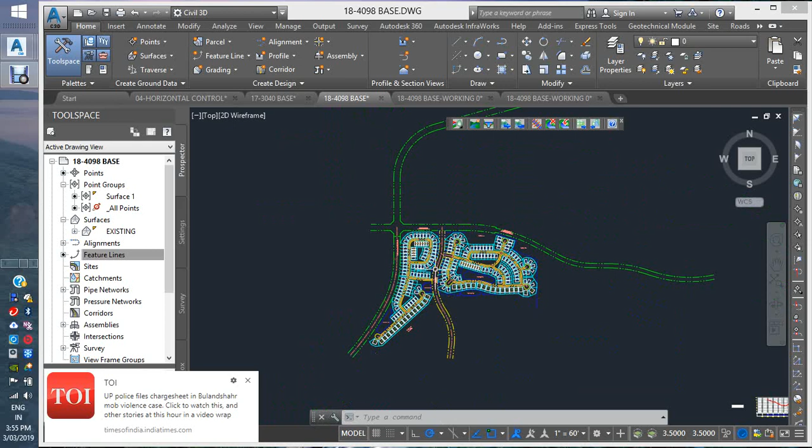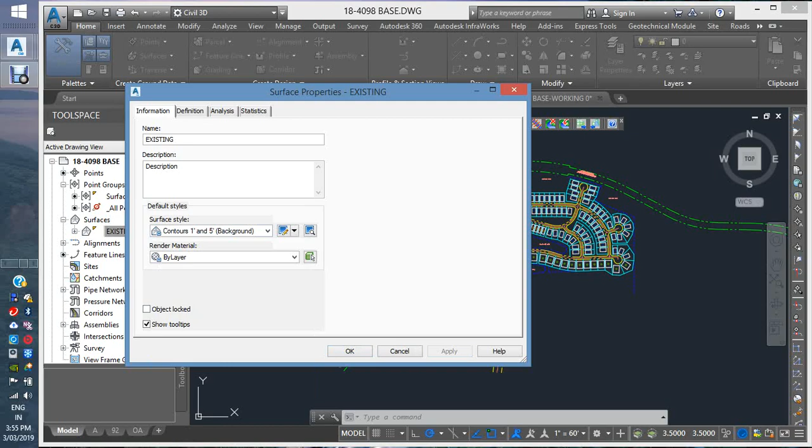Just before execution, just looking at the line work and understanding the surface, so how Civil 3D works in that. If I click on a surface and surface property, you can see the surface isn't highlighted. Probably the layer has been turned off, but if I change the contour surface style differently, it will straight away appear. I can try applying this different style, and you can see that the surface appears.

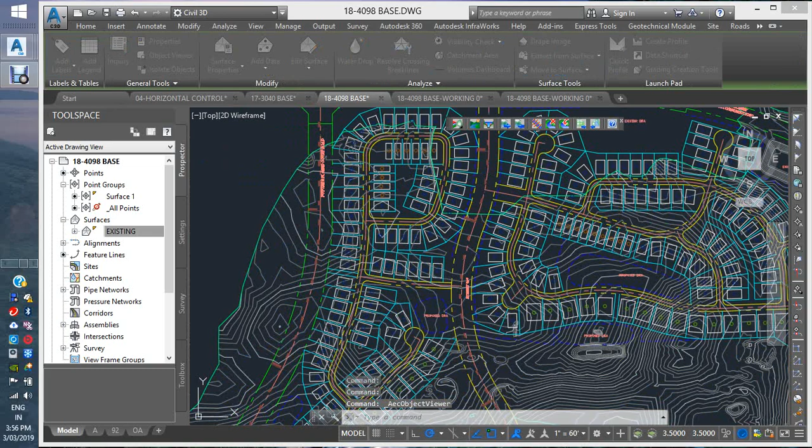This road is connecting to here. We haven't got much information in this area as well. There isn't much surface here. If I click the surface, object viewer, you can see that the extent has been missed out. However, I can see some of the features of the site - could be a bank, depression, some sort of channel, some sort of drainage in here.

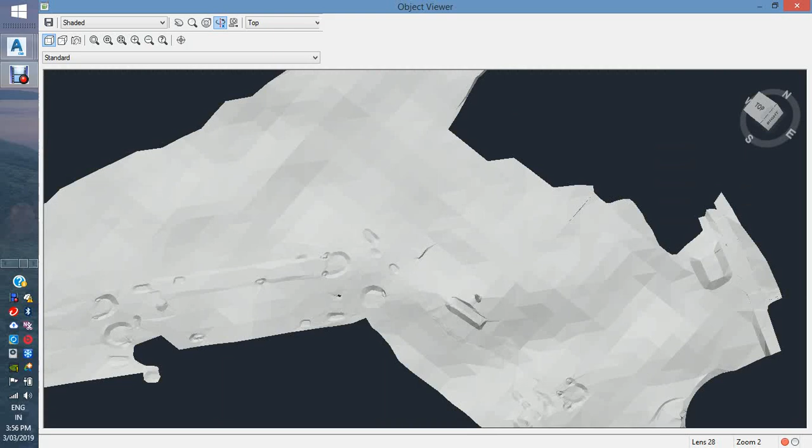I need to see the points, so how Civil will help in defining the points. Points are the collection of attributes of the ground, and you can see that there isn't much going on in here, but there is much going on in here.

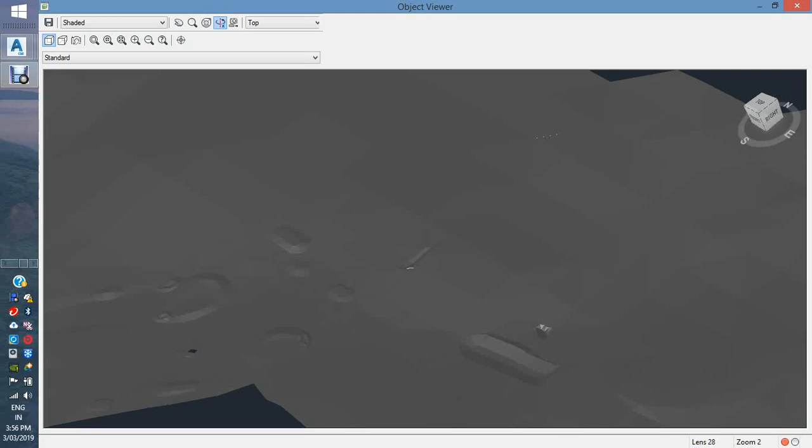So let's just go into points. You can see there are all points, nothing much information about point group, which is banks, top, down, natural surface, but all points are in one.

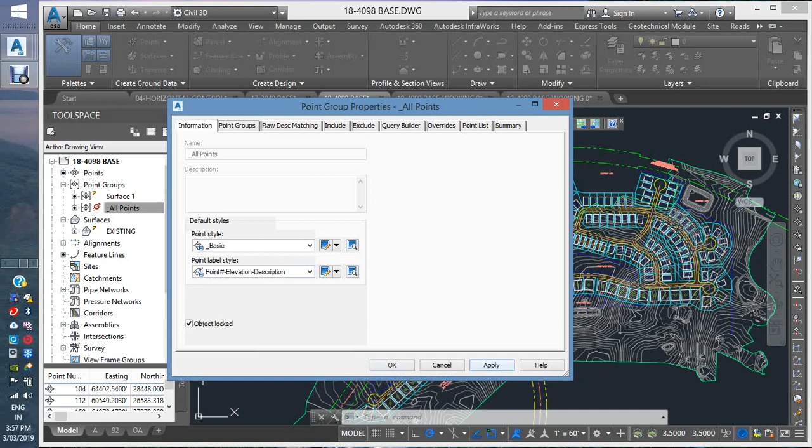If I click here and property, points are not highlighted - could have been a different line type or something. I can change the point style and see if it appears. Still it doesn't appear, could be the layer is turned off. The easy approach is select all layer, Control A, de-highlight, and then turn back on.

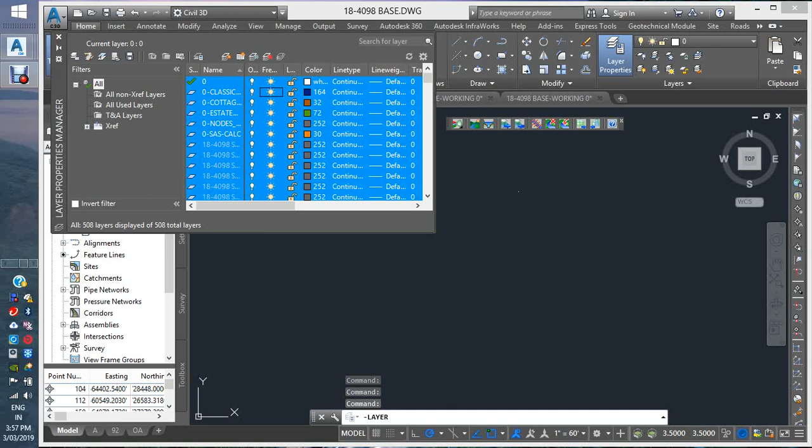By doing that, rather than going into detail and finding the point layer for each one, the points appeared straight away. As you can see, a bunch of points have appeared.

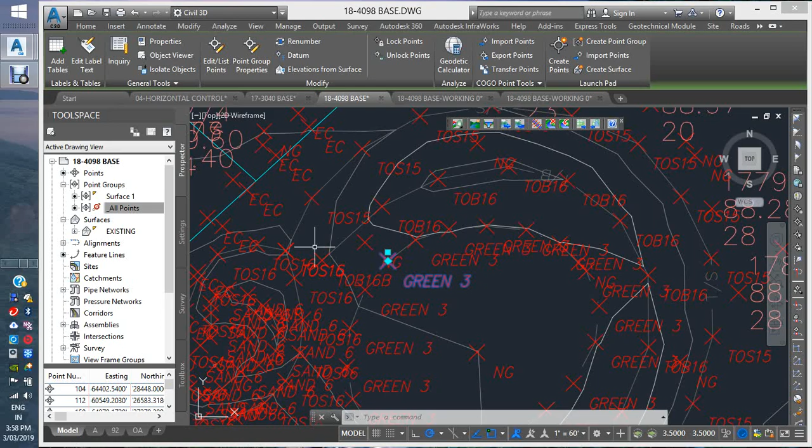Somehow by clicking a point, a list will pop up, but now it looks like something is just not right here - it's going a bit less. By changing the scale to a lower one, you can see the description properly.

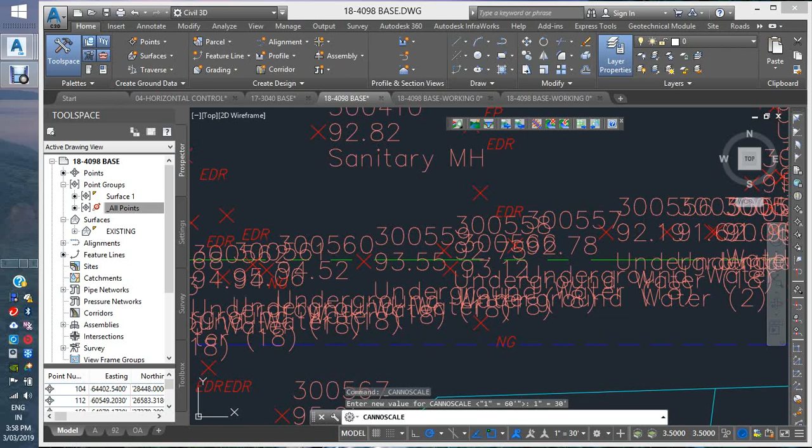So just processing - there seems to be underground water at this point. There isn't any information on the survey. However, it could be - not sure why I'm not selecting this point.

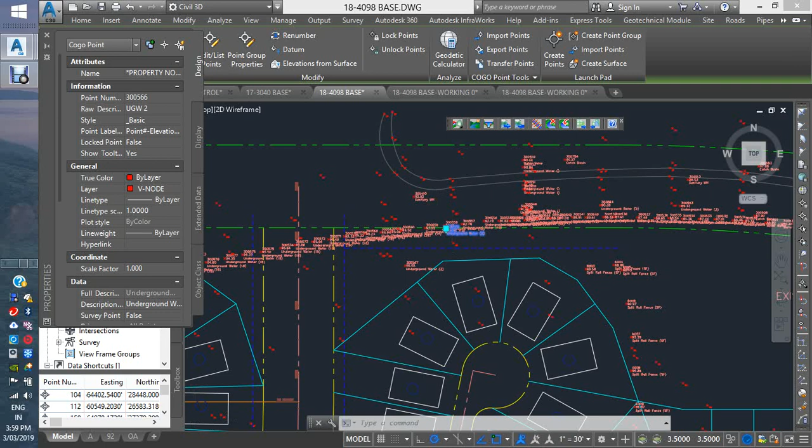So added point list will give me a description. Is that point referring to pipe invert or what? The description is defined as underground - it could have been over invert. That just needs to be explored.

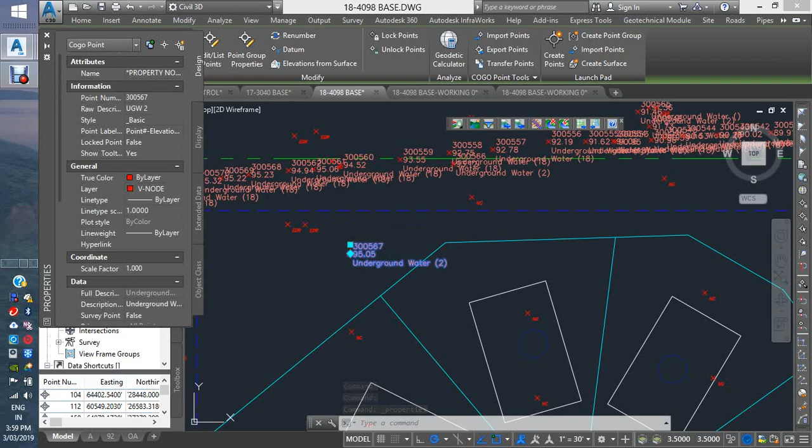Underground water again - just clicking that and property, again that description is underground water too. I'm not sure where the water is going. The few points are the edge of pavement - it could be EP. They have been joined, as you can see here.

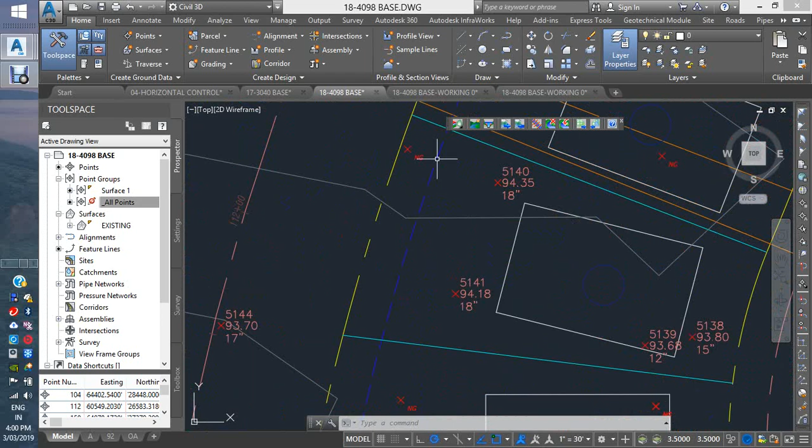So then NG refers to natural ground - that sounds okay. This point is pine - not sure what pine 18 inch is. Is that a width of the spread?

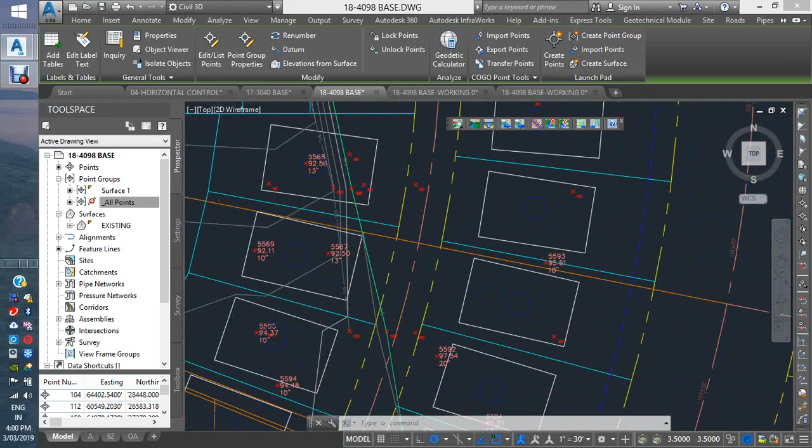Not sure - there was a point called rail fence, split rail fence. Not sure are they being joined - hasn't got joined into it. Underground water has been unlinked. This point has been joined to top of soil - that looks okay.

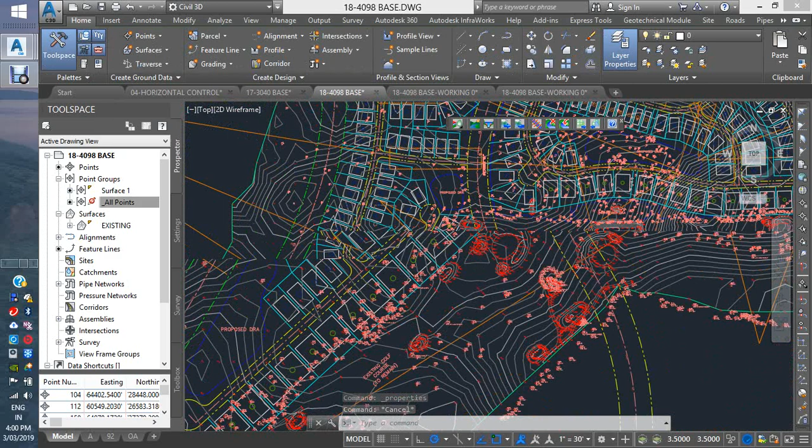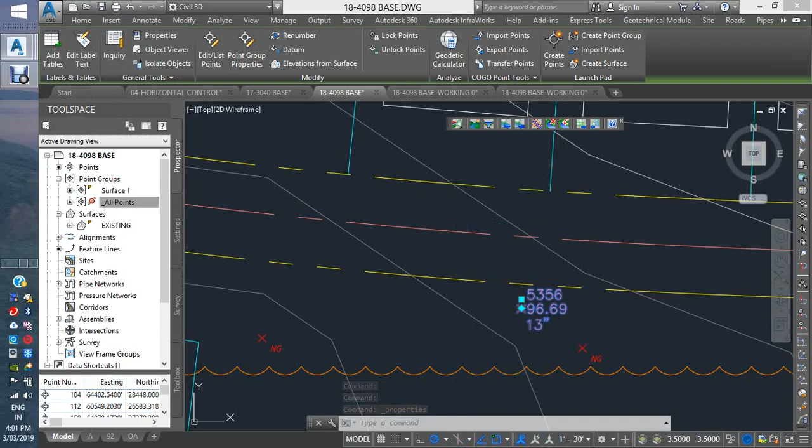There was a tree line somewhere else going on - for example here, what is this point referring to? Pine 13 inch - not sure what that means. There is no tree symbol in the survey as well.

If there are trees, the tree should appear as a tree symbol with a spread that should be scaled out.

No surface in here. Water pipe, no much connection, no information - connection detail is not much surveyed. EDR refers to edge of...

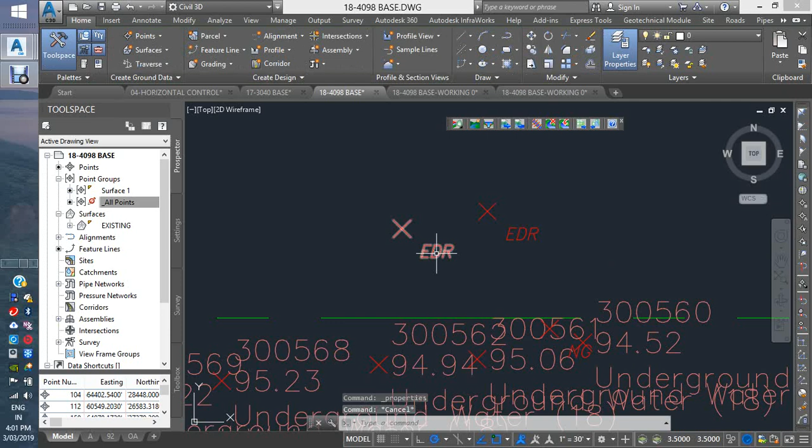Generally the edit list will give me a description, but somehow it's not appearing. I'm not sure why - dirt road edge, but they haven't been joined by feature line. So that's just a few things about the water line all the way.

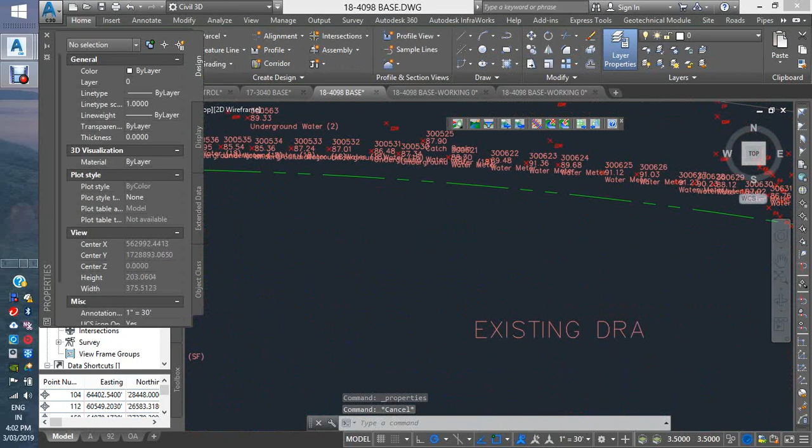Sanitary manhole hasn't got a symbol for that as well. The points are not being grouped properly.

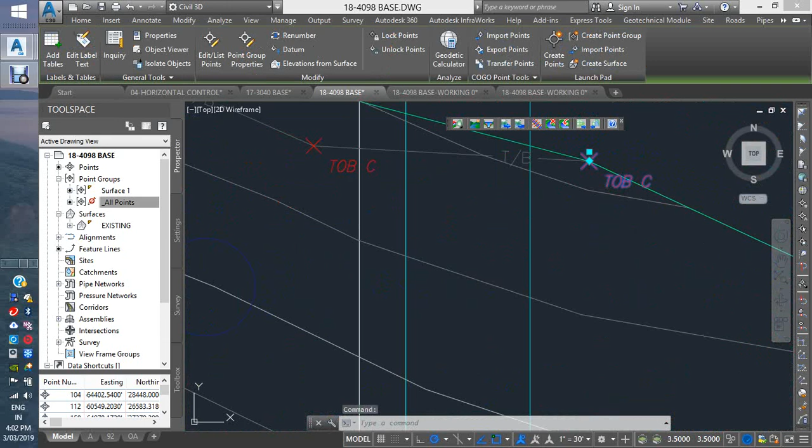TOBC, which is - property - top of bank. I'm not sure, it should be top of bank. Yes, description is top of bank, so that's okay.

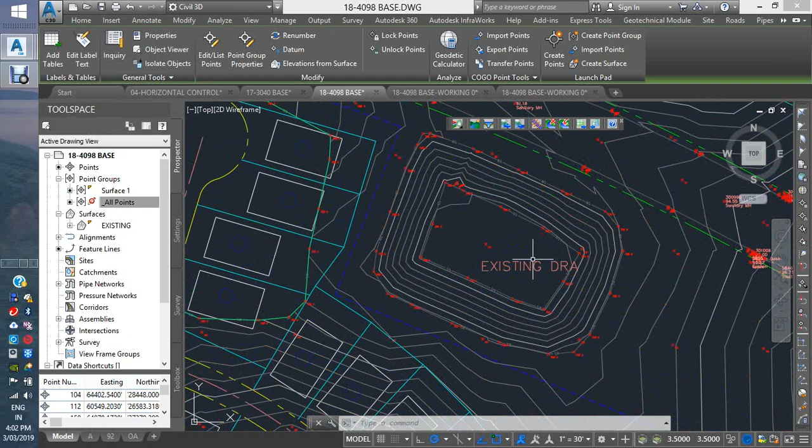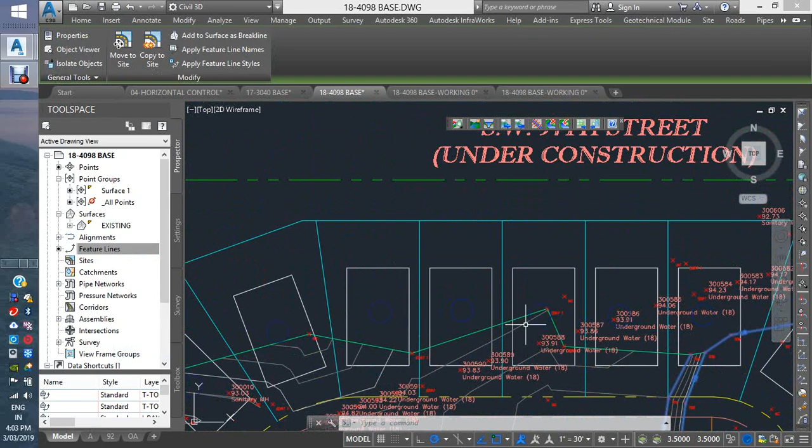DRA, so that's just a pond. And if I go into feature lines and select all, you can see that some features have been added, but this road one and underground haven't got any information in terms of line work, and dimension is not provided - surface extent is not there. This road is going up to here without any surface extent. In here as well, there is no surface extent.

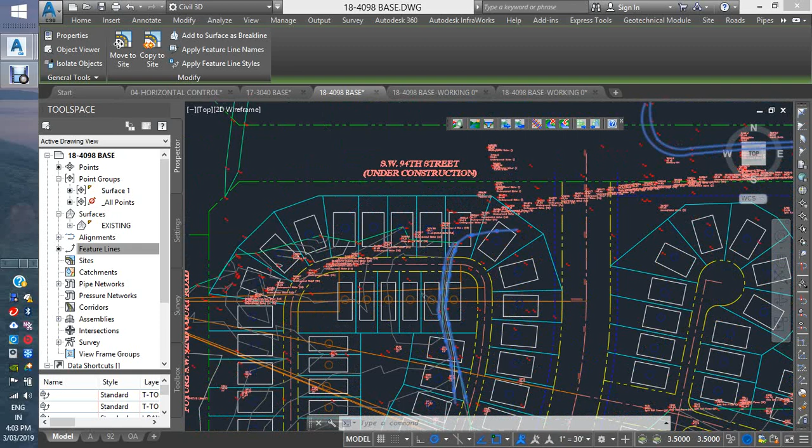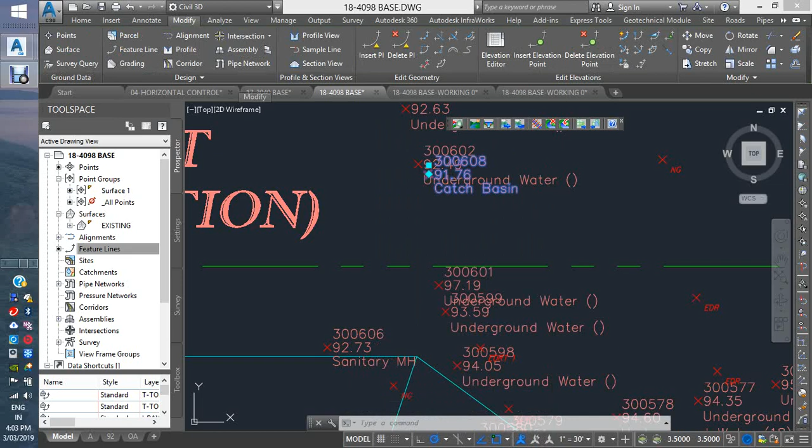Here is a point called a catch basin. So if I just go to point elevation, this property, this property - I'm not sure how the catch basin works, are there pipes leading into the catch basin, or is the road under construction? Hasn't got any work issue in the construction drawing as well.

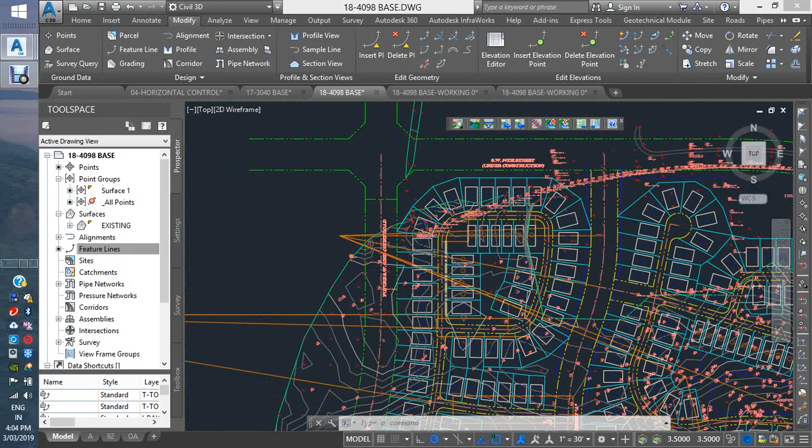So these are the things we can apply Civil 3D at pre-construction stage, pre-planning stage, to be able to see the information we need to proceed.